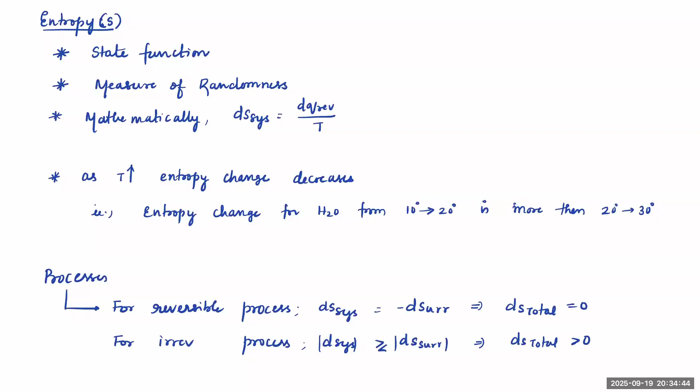We discussed about first law as well as thermochemistry. Now let's get into the second law. So to discuss second law, we need to understand basic terminologies like entropy and all. Okay. So this is where we'll focus.

Entropy is another state function, just like internal energy or enthalpy. We have this one more parameter known as entropy. It is mainly used to measure the randomness, okay, randomness of a system. If there are some particles or anything present within the system, how much is its randomness? That is what is going to be measured.

Mathematically, it is defined as any change in randomness, or what we call the entropy change of a system, is equivalent to the amount of heat that is supplied reversibly to the system at a constant temperature. Okay, so this is what it reads. So, how much amount of heat is being given to the system, right, at a constant temperature. That heat by temperature will increase the randomness of the system, and which is what we measure as change in

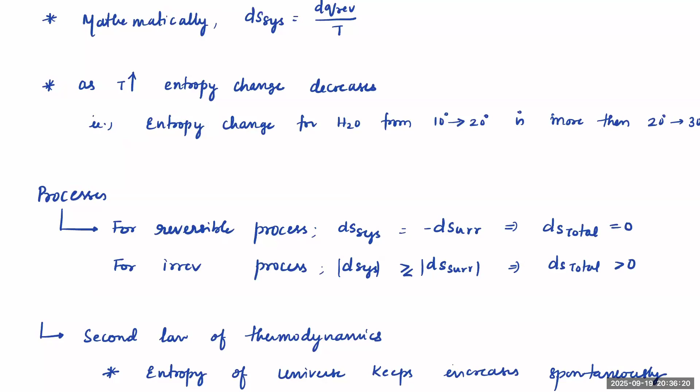entropy. Okay. Now you notice that as the temperature increases, entropy change decreases. This delta S value decreases. Okay. It means something like this. Suppose you have water at 10 degrees and then you are increasing its temperature to 20 degrees by providing some heat to it. So in that case, as you start increasing the temperature, the entropy will start increasing.

So now between these two, if you have delta S1 change, and the same thing between 20 to 30, the entropy change is delta S2. Then one thing we can say, the change in first case will be greater than change in second case. So entropy change at a lower temperature will always be more than entropy change at higher temperature. Okay, clear everybody?

Now, let me just orally remind you, what were the limitations in first law? First law would tell us how the energy transfer is happening, but there is no comment on the extent of the changes that are happening, and the direction the change is happening, whether the overall direction is from system to the surroundings or surroundings to the system. This direction and extent is not something which we can comment on based on first law. But second law mainly emphasizes this part.

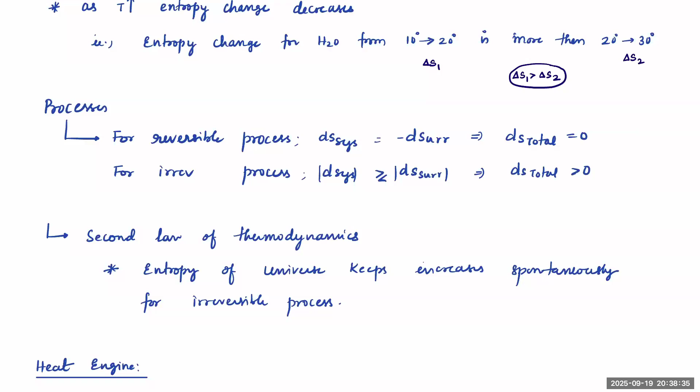For instance, if I take a glass of water here, and this water is at 10 degrees centigrade, what is the chance that it will start forming ice? Or it will start increasing its temperature to, let's say, 20 degrees, considering the outside temperature is 40 degrees Celsius. So chances are this direction is going to be more observed as compared to this direction. Because the surroundings temperature is more, the water will more likely try to gain energy from the surroundings and increase its temperature further.

We cannot expect that at these particular conditions the water will form ice on its own. No, unless we continuously keep decreasing the temperature and bring it to 0 degrees and below, only then will this water start converting into ice. Otherwise, this direction is called the spontaneous process direction. This direction is called the non-spontaneous process direction. Clear? In fact, all natural processes that happen on their own are spontaneous. So this is one important definition we should understand. Clear?

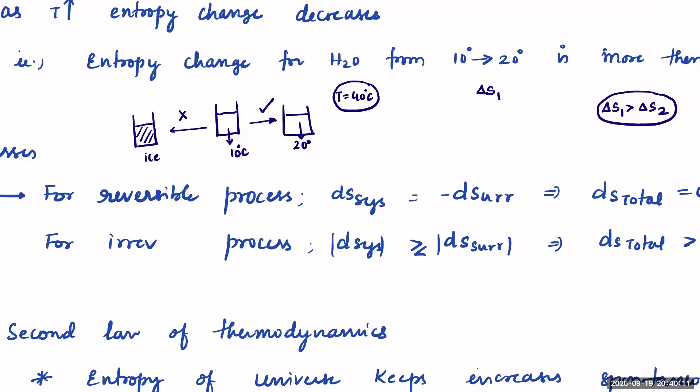Second thing, whenever there is an entropy change for the system, certainly there is some entropy change happening even for the surroundings. And you will notice that delta S of the system is equal to minus delta S of the surroundings, which means delta S total is equal to 0. In fact, any total entropy change is always the sum of the entropy change of the system and the entropy change of the surroundings together.

If a process is happening reversibly, it means that whatever the system's entropy has increased, the same amount was decreased in the surroundings, and vice versa. If the system's entropy decreases, the surroundings' entropy has increased by the same amount. But if it is irreversible, we cannot say that the change magnitude is the same for both. It might happen that the system's entropy is more changed compared to that of the surroundings.

But one thing is for sure: if it is an irreversible process, and we learned that irreversible processes are spontaneous, then for spontaneous irreversible processes delta S of the total will always be greater than 0. Clear, everybody? This is the basic idea we should have first.

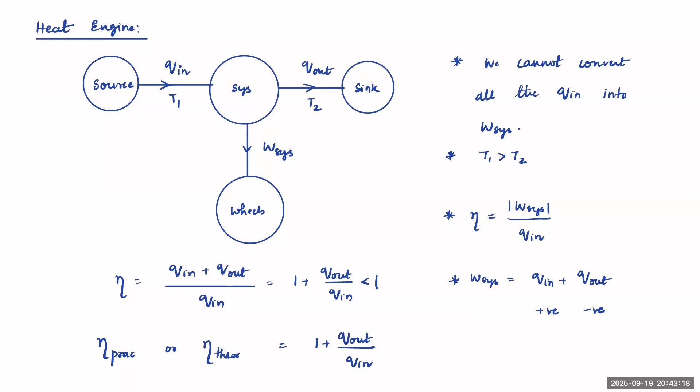Now, let me explain this using the best example possible, which led to the definition of entropy in the first place. The idea of entropy came from the concept known as heat engine. What does heat engine mean? Imagine the system which I have written is like an engine, and you are providing heat to that engine.

To provide heat to this engine, the temperature at the source should be higher so that heat can be pushed into the engine. The heat getting into the engine I will write as Q in, and the temperature at which this transfer happens, T1. In physics you will use QH and TH, where H represents hot reservoir, which is nothing but the source maintained at temperature TH. In chemistry we simply write Q in, the heat going into the heat engine at temperature T1.

Now what happens? The heat engine accepts that heat and tries to convert it into work. The first steam engine starts moving because it converts that heat into work, moving the wheels. But the problem is, the heat engine can never convert all the heat it has taken into work done. Some of the heat will always be lost.

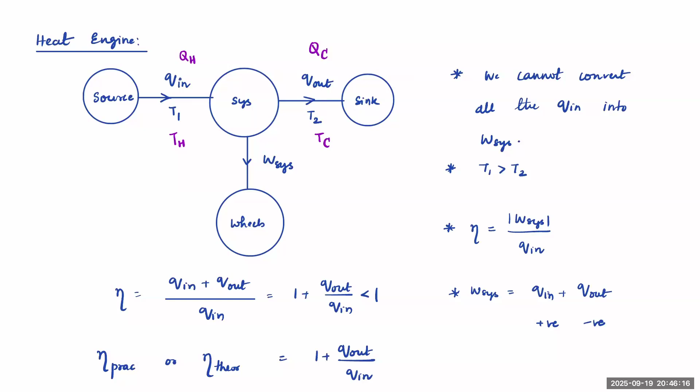The lost energy goes to the surroundings, which in chemistry we call the sink, and in physics the cold reservoir. So here you can write it as QC: some heat is lost towards the cold reservoir or sink, maintained at temperature T2, or TC. This is what you usually expect. There isn't any engine which can convert the entire heat given into work done.

So what should we know from here? Conventionally in chemistry, anything coming to the system is positive, and anything going away from the system is negative. So Q in or QH is positive, Q out or QC is negative, and work done by the system is negative because it is done by the system.

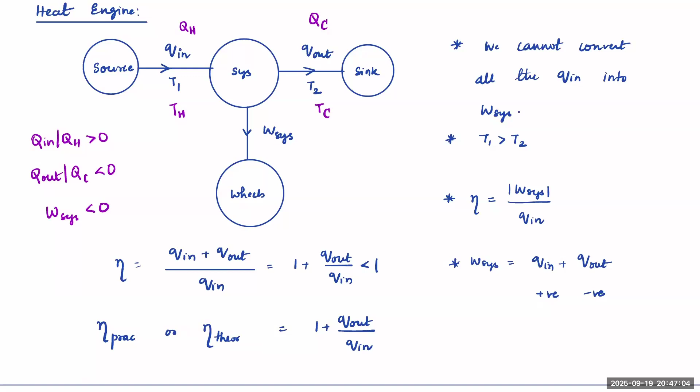These are three important things we should know. Okay. So from here, I can say one thing, that whatever the heat that is being supplied here, see, Q, okay, QH plus QC, that is actually making the work done. Okay. QH plus QC. QH means it is a positive value. This is a negative value. So obviously the difference between these two is what we get as work done. Clear?

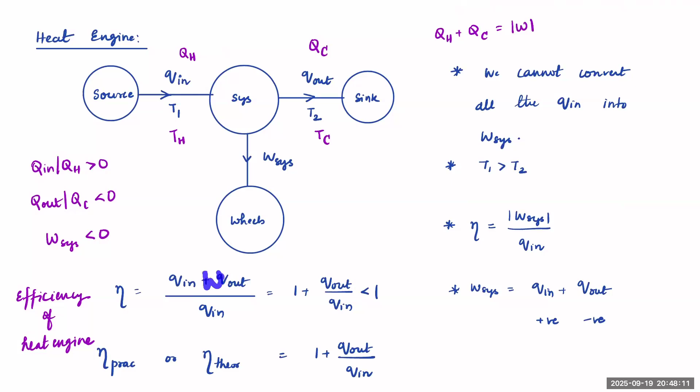Now here is an interesting part. We define a term called efficiency, or efficiency of heat engine. What does efficiency of heat engine mean? That is how much work you are able to extract from the given amount of heat. Have you noticed this? Q in plus Q out is nothing but work done. And that work done is the work which we are extracting out of the given amount of heat. Given amount of heat is Q in. Correct? So Q in plus Q out by Q in is what we define as efficiency.

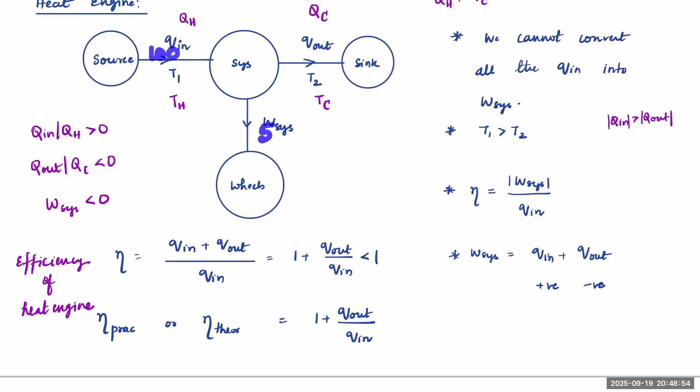And therefore, efficiency can be written as 1 plus Q out by Q in. Now notice this one. Q in by magnitude is always greater than Q out, because you are obviously giving more heat compared to what is dissipated out. It is like this. You are providing 100 kilojoules of heat, out of which 50 kilojoules is converting into work. So the other 50 will be heat that is lost. So obviously Q in will always be greater than Q out.

So this value will be positive. Sorry, this value will be a fraction which will be negative here because Q out is negative. So 1 minus something is always less than 1. That's why efficiency of the engine is always less than 1. Okay.

Now, with this engine, experimentally, we can do it and figure it out as well. That's why if you are representing efficiency in terms of heat exchanges, in terms of how much heat is being given and how much heat is being lost, then that efficiency is defined as practical efficiency. We call it practical efficiency, correct?

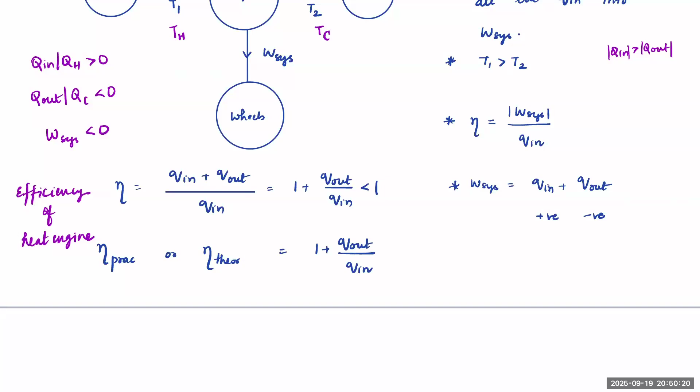In fact, you can define it theoretically also. Theoretically, we can calculate the heats and then figure out the value here. And practically also, you will notice this. So whether it is theoretical or practical, you get this formula: 1 plus Q out by Q in. Clear? Got it?

Now, there are multiple statements which have been proposed from the heat engine. The first statement, which we will be using more often in physics, is the Kelvin Planck statement. This is an alternative statement for the second law of thermodynamics. Clear? It states that it is impossible for any device, as heat engine,

that operates on a cycle, to receive heat from a single reservoir and produce a net amount of work. So it means that some amount of heat must be rejected at low temperature.

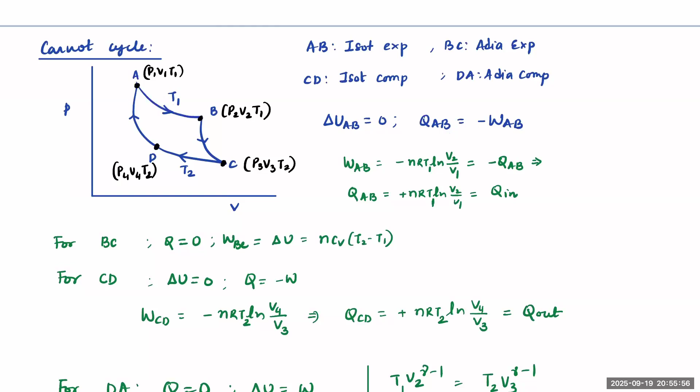Now notice what factors we need to know. From A to B, there is no change in temperature, and we are assuming an ideal gas only. So delta U of AB is 0 because delta U is nCv delta T. Delta T is 0 means delta U will be 0. So between A to B, if delta U is 0, work will be the same as heat with a change in sign. So what is the work done from A to B?

It is an isothermal reversible expansion because I am showing a process curve. So for reversible isothermal expansion, the formula is minus nRT1 ln V2 by V1. This is work done from A to B, which gives the heat from A to B. Q of A to B is this much. I can represent this heat as Q in, the amount of energy that we have given to the system.

Next, let us analyze B to C. From B to C, Q is 0 because it is an adiabatic process. So W of BC should be equal to delta U, and delta U is nCv (T2 minus T1). So this is the second part which we know.

Third part, from C to D, it is again an isothermal compression. So delta U again becomes 0, and Q will be equal to minus W. So W of CD will be minus nRT2 ln V4 by V3. Now, what is the heat from C to D? It will be equal to minus W, which is plus nRT2 ln V4 by V3. Correct?

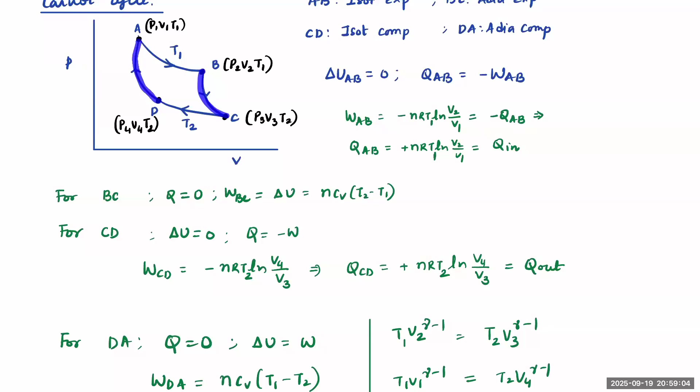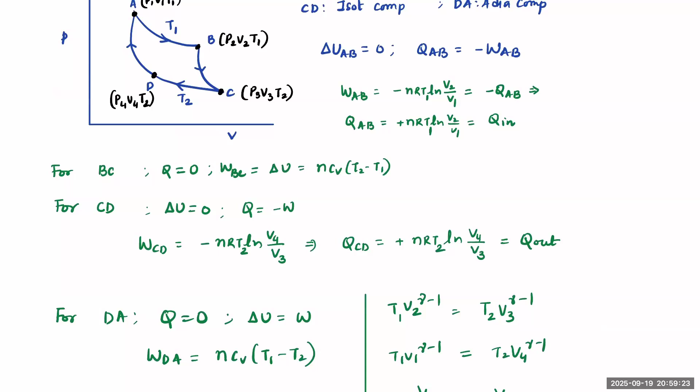Now let's notice this. These two are reversible adiabatic changes, and for reversible changes this formula is applicable. So at point B, I can write T1 V2 power gamma minus 1 is equal to, at point C, T2 V3 power gamma minus 1. Similarly, we can write at these two points also.

So T1 V1 power gamma minus 1 is equal to T2 V4 power gamma minus 1. If you divide both of them, T1 and T2 cancel, and we get V2 by V1 is equal to V3 by V4. Which means ln V2 by V1 will be equal to minus ln V4 by V3.

Got it? Now notice what is the total work done. Total work done will be equal to W A to B, B to C, C to D and D to A. And you know that W BC and DA, these two will get cancelled. BC and DA will get cancelled. So what is left now?

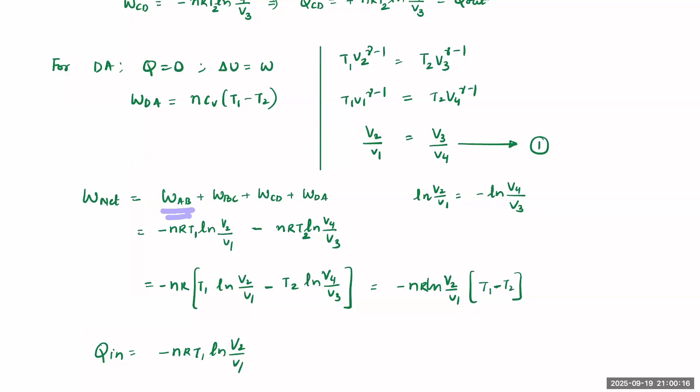Work from AB, which is minus nRT1 ln V2 by V1. And this is minus nRT2 ln V4 by V3. And from there, if I take nR common, I will get T1 ln V2 by V1, and minus T2 ln V4 by V3. So from here, if I take this minus common outside, it is minus nR ln V2 by V1 into T1 minus T2.

Okay. So Q in, because this is the total work done. And how much is the input of the heat? It is minus nR T1 ln V2 by V1. And now efficiency, how do we define efficiency? That is work done by heat given. So work done is minus nR ln V2 by V1 into T1 minus T2 divided by nR T1 ln V2 by V1.

Okay. So now you can see these two factors will get cancelled. nR will get cancelled. What is left is T1 minus T2 by T1. Or I can write it as 1 minus T2 by T1. Now this is the theoretical efficiency. So efficiency in Carnot cycle.

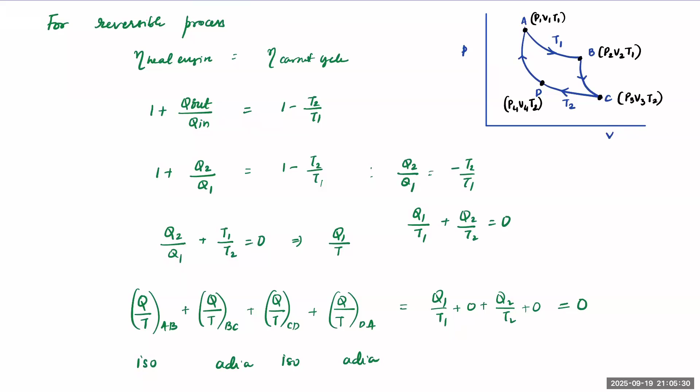Okay. We know that for a heat engine, we have written the efficiency as 1 plus Q out by Q in. Here it is 1 minus T2 by T1. So if I bring these terms together, cancel off this 1 and 1, then I can say Q2 by Q1 is equal to minus T2 by T1. Correct? And if I take it to the left hand side, I will get Q2 by Q1 plus T2 by T1 is equal to 0.

Or I can in fact do one thing, put T2 here and bring Q1 here. In that case, I get Q1 by T1 plus Q2 by T2 is equal to 0. This is also something I can write. Everybody, please notice this part here. Q1 by T1 plus Q2 by T2 is equal to 0. Okay. Now notice this carefully. Can I write the same equation this way?

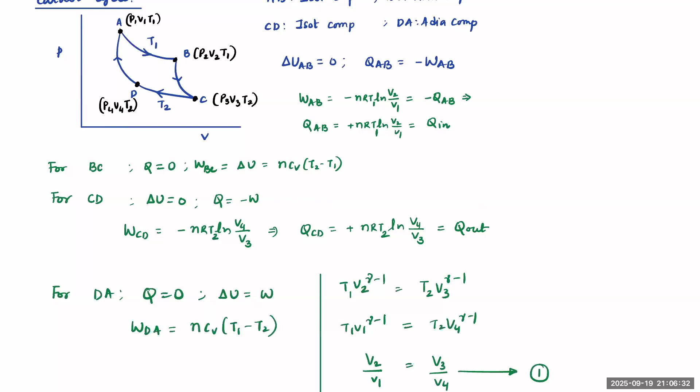Q by T as a factor, as some kind of a parameter. That q by t from A to B, if you go in the Carnot cycle, is q1 by t1, correct? A to B is q1 by t1, plus B to C, q by t. Because q is 0, this factor has become 0.

And again from C to D, that is q by t, this is nothing but q2 by t2. So again this factor exists, but the last factor q by t again is 0, because from D to A, q is 0. So can I write this same equation as q1 by t1 plus 0 plus q2 by t2 plus 0 is equal to 0. So this is for isothermal, adiabatic, isothermal, adiabatic.

Correct? So I got a new factor altogether, which is called q by T. That q by T value in a Carnot cycle, from the start as you come back to the original state, the sum of that factor becomes 0. Now tell me, if a parameter's change becomes 0 in a cyclic process, what does that mean? That means it is a state function, isn't it? A state function will only have its summation over the entire cycle as 0.

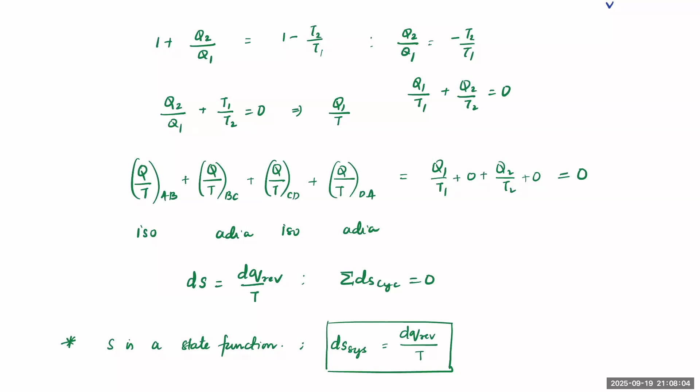Got it? So therefore, q1 by T1 plus 0 plus q2 by T2 plus 0 equal to 0 represents that this factor which I'm defining is a state function. So hence this q by T function is what I'm defining as dS, change in entropy. That's how we got the idea of what is entropy. So entropy change is equal to q by T. If it is a small change, I can write it as dq by T. And this is only defined for reversible processes.

So therefore, dS has to be dq reversible by T only. And summation of dS cyclic is 0. That means it is a state function. So S is a state function and this is the formula. I guess the part is clear, everybody?

Okay. Now, let me explain the second part. This is something which I assumed to be reversible, correct? So we got one thing. For a reversible process, the total entropy change of the system has become 0, correct? But now what if it is an irreversible process? For an irreversible process, you know that eta theoretical is greater than practical. We know this because of the work done, right?

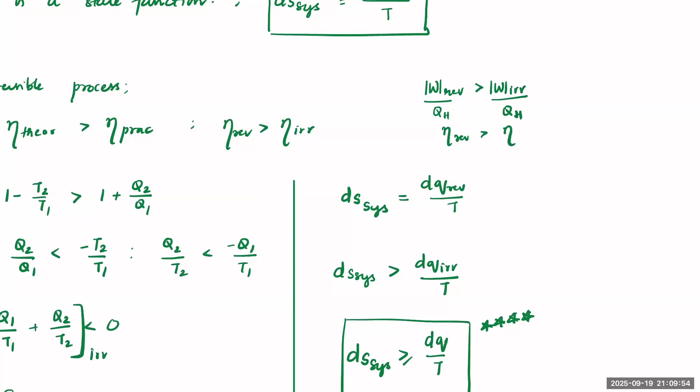Work done in a reversible process will always be greater than work done in an irreversible process, correct? And if I divide it by qh here, then I can say reversible work done by qh is always greater than irreversible work done by qh. And this is efficiency reversible versus efficiency irreversible. That's what I have written here. Theoretical efficiency is always greater than practical efficiency. That is, reversible efficiency is greater than irreversible efficiency.

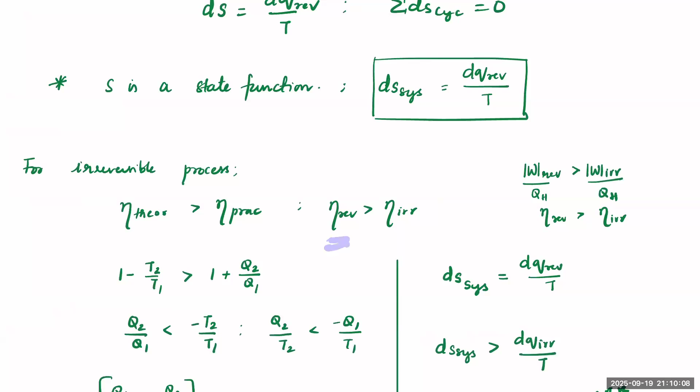Reversible efficiency we defined based on the Carnot cycle, which is 1 minus T2 by T1. Irreversible, we can write in terms of Q1, 1 plus Q2 by Q1. Now you can see these will get cancelled. So Q2 by Q1 is less than minus T2 by T1. Correct? Okay? And if I bring Q1 here and T2 here, I will get minus Q1 by T1 and here Q2 by T2. Both of them are related this way.

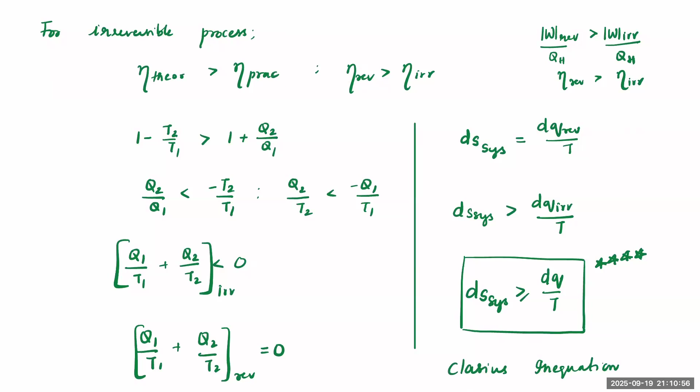Now, if I bring it to the left hand side, I will get Q1 by T1 plus Q2 by T2 is less than 0. Clear? So from here, what are we getting? The summation of this value which we defined earlier, summation of Q by T, is coming out to be less than 0 for irreversible. Acha, what if it is reversible? If it is reversible, it becomes equal to 0, correct?

So this is for irreversible, and summation of Q by T earlier we got equal to 0. This was for reversible. Now these two put together, we can write as a formula: the integral of Q by T will be less than or equal to 0 for a cyclic process. And this is called the Clausius inequality. We call it Clausius inequality or inequation. Okay.

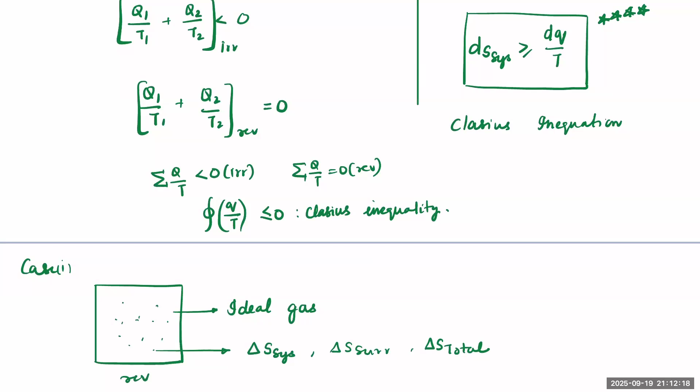Got it. Now notice, entropy change of a system was defined as dq reversible by T. dS of the system can also be compared with dq irreversible by T, but it should be greater than that. It cannot be equal to that. Clear? Because equal means it has to be reversible only. If it is greater than this value, it has to be irreversible heat given. Got it?

Everybody clear? So in simple terms, I can write S is a function of disorder. S is a function of disorder. So if disorder increases, which means entropy increases. Okay.

Any doubt here? Now notice the last step here. dS system is greater than or equal to dq by T. Okay, what does this mean? See, if dq by T is less than 0, that means it is irreversible. But if it is equal to 0, that means it is reversible.

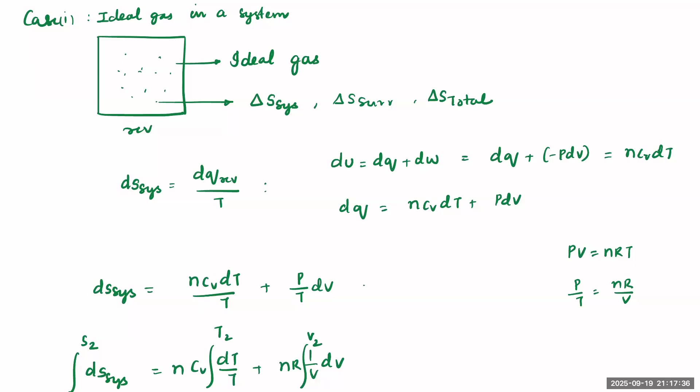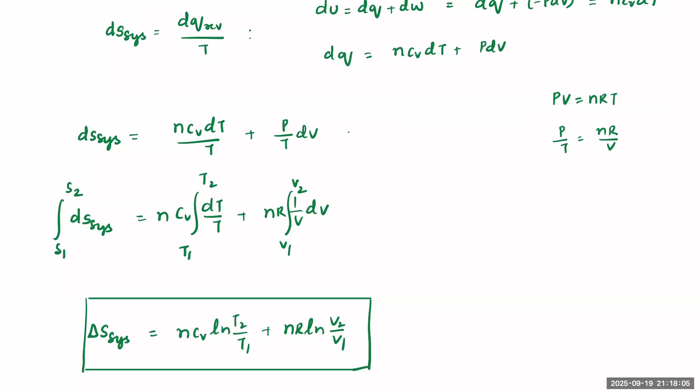I can use that, isn't it? So instead of this q reversible, I can write this value here, because currently I'm doing it for a very small change, assuming it like a reversible change. So nCv dT by T plus P by T dV. Now, if I integrate on both sides, dS of the system from S1 to S2 will be nCv dT by T plus nR integral of 1 by V dV, from V1 to V2.

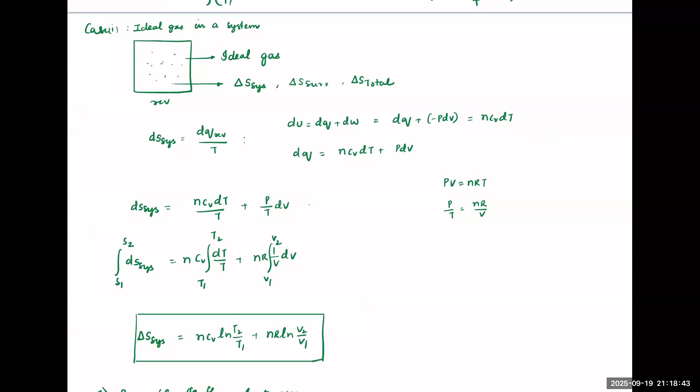Integrating, I'll get nCv ln T2 by T1, and nR ln V2 by V1. So this is the formula we'll be using for an ideal gas in a system: how much is its entropy change if temperature and volume are changing. I guess the general formula is clear, everybody. Delta S of the system is nCv ln T2 by T1 plus nR ln V2 by V1.

Now let us start putting case by case here. First case is, what if it is a reversible isothermal process? We are taking the same ideal gas, but in a reversible isothermal process. Now what can we say? Just now we have checked this formula. Since it is isothermal, there is no temperature change, so this factor is 0. So delta S of the system will be nR ln V2 by V1.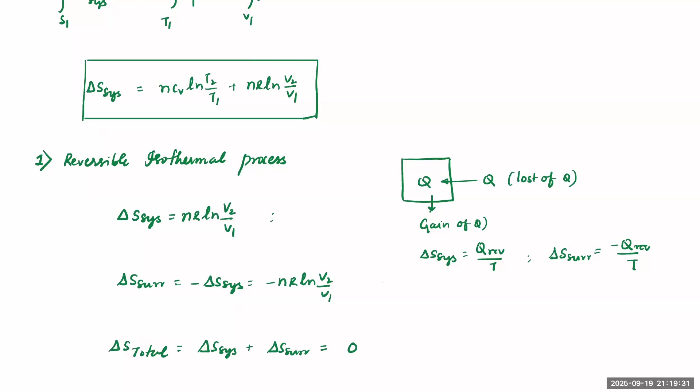And what will be delta S of surroundings? Because it is reversible, whatever the change in the system, that should be the same loss in the surroundings. So delta S of the surroundings will be minus nR ln V2 by V1. This is system, this is surroundings. And delta S total will be the sum of those two. It has to be 0 because it is a reversible isothermal process. Any reversible process means delta S total should be equal to 0.

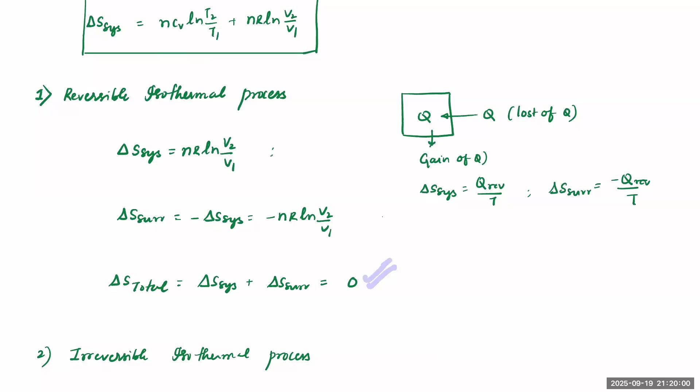Now, second part is isothermal irreversible process. So you can see delta S of the system will be nR ln V2 by V1, because it is still isothermal, so the T factor will not be there. This is the formula we know. Delta S of the system reversible will be equal to delta S of the system irreversible, as long as the final volume conditions are same. Does it make sense what I have written?

See, whether you operate a system reversibly or irreversibly, as long as your final destination is same, the entropy change will be same. Reason: entropy change is a state function. It only depends on initial and final condition. So whether you drive the change reversibly or irreversibly, both magnitudes should be same. Got it?

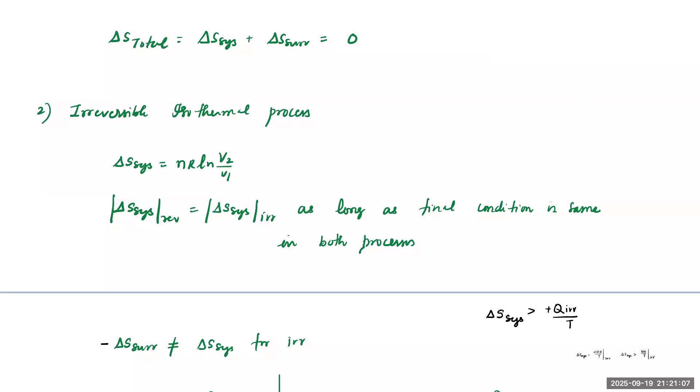Therefore, I can say that minus delta S of the surroundings is not equal to delta S of the system for irreversible process. For irreversible, delta S of the system is not equal to Q reversible by T. But now for irreversible processes, what about surroundings? For reversible process, delta S of the surrounding will simply be equal to minus Q reversible by T. This is what we learned.

But what about irreversible case? Delta S of the system is also not equal to Q irreversible by T. But notice this one: for irreversible case, delta S of the surroundings will be equal to minus Q irreversible by T. Now you might say, sir, how is this formula valid? When there is some heat lost or gained in the surroundings, do you see much change occurring in the surroundings?

Simple example, let's say I took a matchbox and started burning a small piece of paper here. The temperature change because of that burning might affect a small region where I'm sitting. Will there be much change of temperature in the surroundings? No, not much. Which means for surroundings, any change happening is a very gradual, very slow, quasi-static change. Understood?

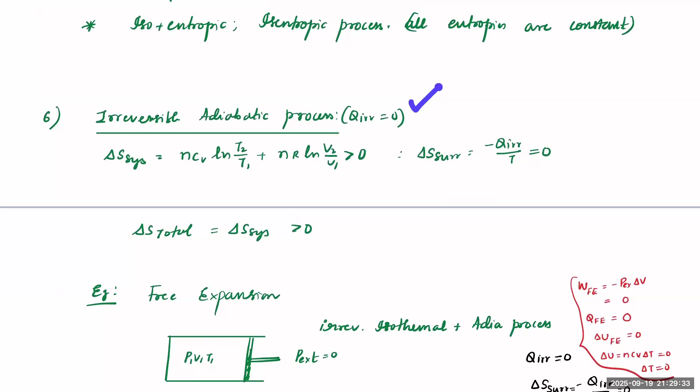Now let us talk about irreversible adiabatic process. Q irreversible is 0. Now, delta S of the system, how did we define? N CV ln T2 by T1 plus N R ln V2 by V1. This is how we define. Since it is irreversible, minus Q irreversible by T should be defined as delta S of surrounding. But because Q irreversible is 0, this factor is 0. So delta S of the surrounding will be equal to 0. So delta S of total will be delta S of the system plus delta S of the surroundings. So therefore delta S of the total is same as delta S of the system, and that has to be greater than 0. So this is irreversible adiabatic process.

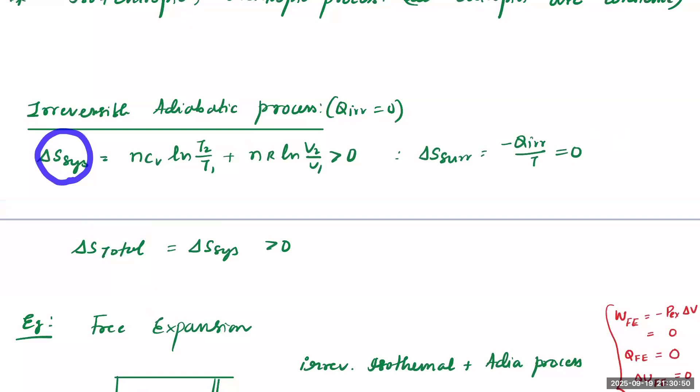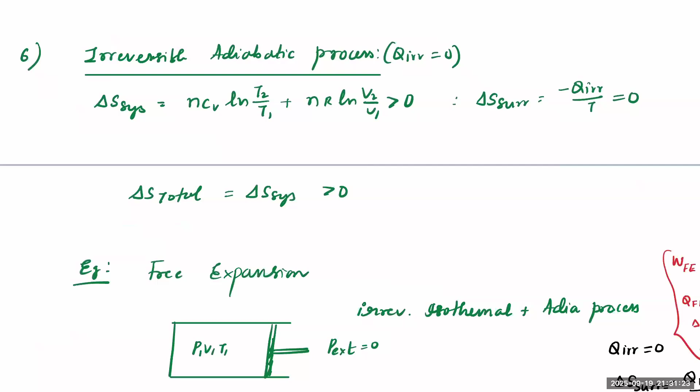Now there is one very important thing. Since delta S of the system in a reversible process was 0, I can't say that delta S of the system for irreversible will be 0. You cannot say that, sir, it is a state function. Yes, it is a state function, but you will never be able to achieve all the dimensions same or any one of the dimensions same with reversible versus irreversible. So therefore, in case of irreversible, delta S of total is equal to delta S of system, which is greater than 0.

Guys, please check this out. If there is any doubt, let me know. Otherwise, we'll go ahead.

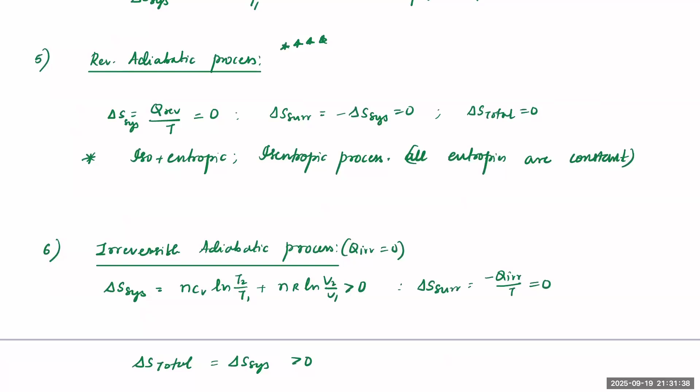What if you have a free expansion? Free expansion, we have learned it earlier. In case of free expansion, work done is 0. Heat given is 0. So it is irreversible adiabatic. Delta U is 0. Delta H is 0. Delta T is 0. Now, imagine an ideal gas is present at pressure P1, volume V1, temperature T1. Everything outside is vacuum, so there is no external pressure as such. So naturally this gas will start trying to expand on its own.

So irreversible isothermal plus adiabatic process. It is irreversible, it is isothermal, temperature is not changing, and adiabatic also. So delta S of system will be equal to nR ln V2 by V1, and delta S of surroundings will be equal to 0, because Q irreversible is 0, but system cannot be 0 because volume is increasing. Hence, delta S of total will be equal to nR ln V2 by V1. So remember in free expansion, if anything is changing, it has to be entropy of the system. So entropy of the system is increasing. Clear?

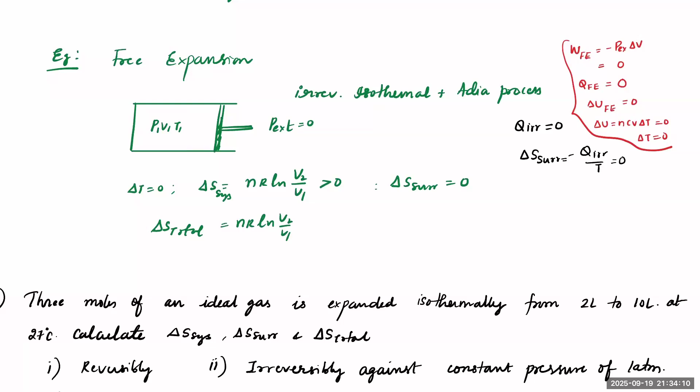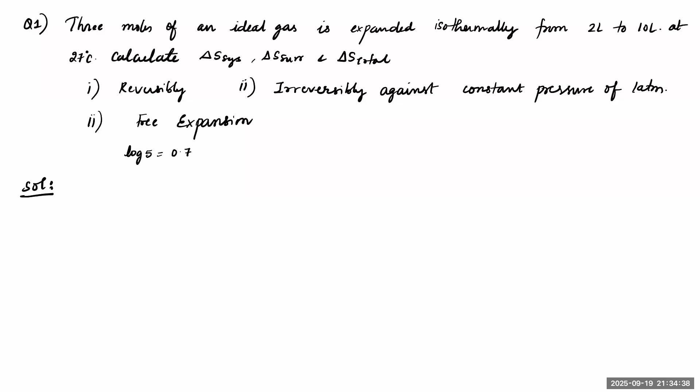Right. Let's solve this question now. Check it out. 3 moles of an ideal gas is expanded isothermally from 2 liters to 10 liters at 27 degrees. Calculate system, surrounding, and total entropy change in 3 different conditions. One is reversible, irreversible, and free expansion.

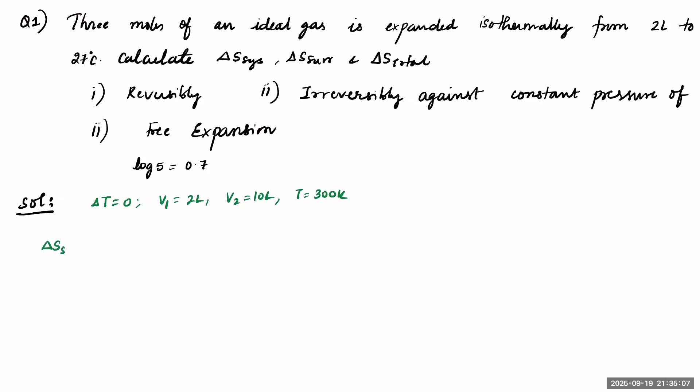So, starting with temperature T1, sorry, temperature is constant, so delta T is 0. Volume V1 is equal to 2 liters, V2 is equal to 10 liters. Temperature at which it is maintained is 300 kelvins. So now delta S of the system will be equal to nCv ln T2 by T1 plus nR ln V2 by V1. This is the general formula. And now since temperature change is not observed, so it has to be only nR ln V2 by V1.

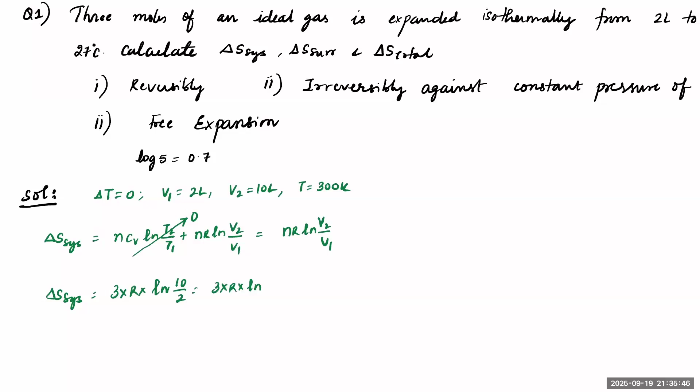So delta S of the system is equal to 3 moles. So 3 into R into ln V2 by V1, which is 10 by 2. So it is 3 into R into ln 5. So this is equation 1. Put this as equation 1.

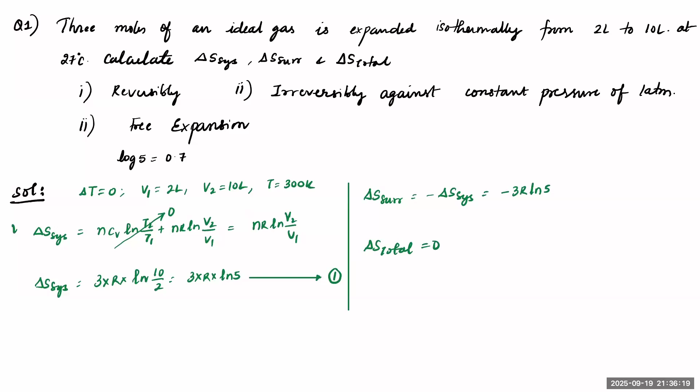Okay. Now what about surroundings? Delta S of surrounding, if it is reversible, has to be minus delta S of the system, which is equal to minus 3R ln 5. And delta S of the total has to be equal to 0. So this is for case 1. Let us do it for case 2 now.

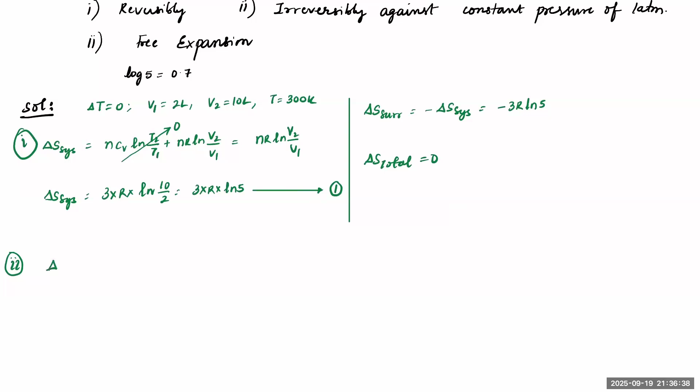In case 2, it is irreversible against constant pressure of 1 atm. External pressure is given as 1 atm. So you can see here also delta T equal to 0 because it is isothermal, and I can say that delta S of the system operating reversibly has to be the same as delta S of the system doing it irreversibly to finally go to the same volume. So in that case delta S of the system irreversibly will be equal to the same 3R ln 5,

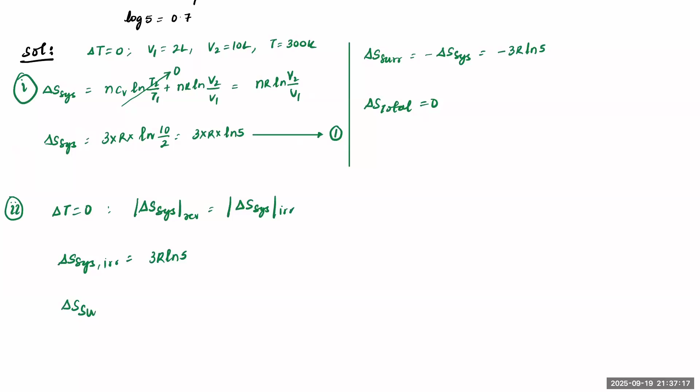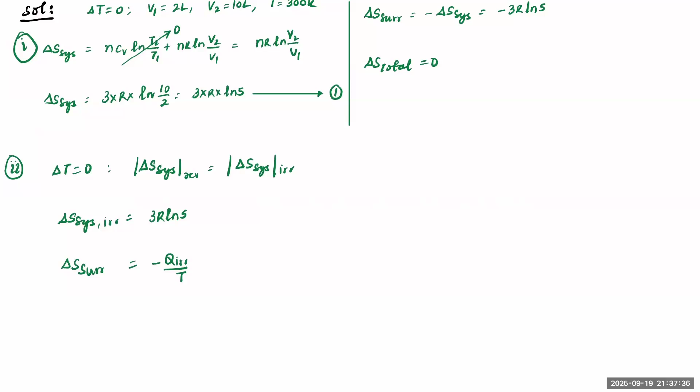while delta S of the surrounding will be equal to minus Q irreversible by T. It has to be minus Q irreversible by T. Clear? And how much will minus Q irreversible by T be? Now notice this one. Because it is an isothermal process, delta U will be 0. If delta U is 0, Q irreversible will be equal to minus W irreversible. So work done irreversible will be equal to minus Q irreversible.

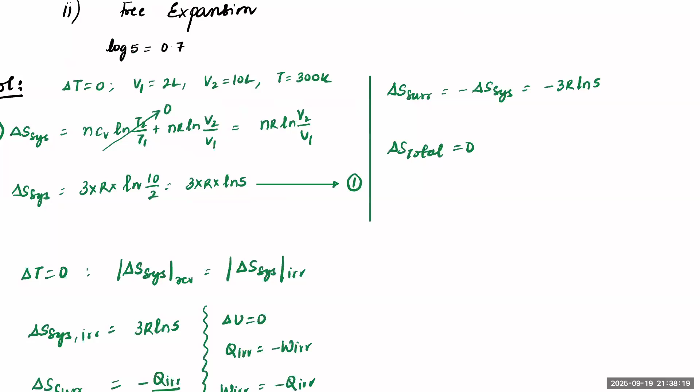So therefore, delta S of the surrounding can be written as W irreversible by T, and W irreversible can be written as minus P external into delta V by T. External pressure is given as 1 atm, into final volume 10 minus initial volume 2. So it is 8 atm liter, and this will be the work done, divided by T. T is 300.

Okay. I can put this as atm liters. I can put this in joules as 8 into approximately 100 by 3. So which is 8 by 3 joules per Kelvin. This is the approximate value for delta S of surroundings. This is in the second case, everybody.

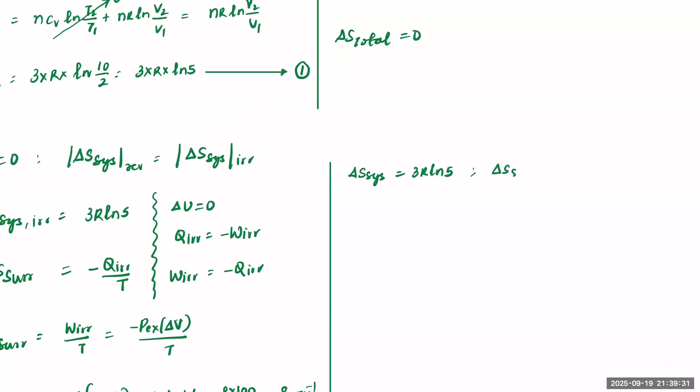So you can notice that delta S of the system, which is equal to 3R ln 5, is not changed. While delta S of the surrounding, we just found it as 8 by 3 joules per Kelvin. So what should be delta S of total? It has to be 3R ln 5. Okay. And notice this one.

So here minus should be there. This is actually a minus value. So that is equal to minus of 8 by 3. So this will be the case, and it has to be greater than 0. Even after solving, you will get the same thing. Please go through the two cases here. I hope the irreversible case is clear, everybody.

Finished. Second one is clear.

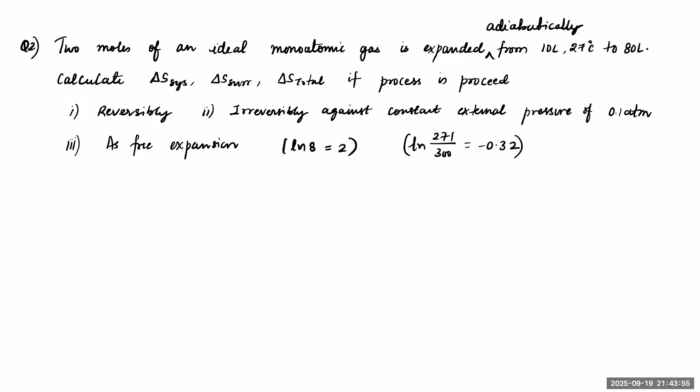Finished? Everyone? Right. Let's see the next one here on similar lines. 2 moles of an ideal gas is expanded adiabatically this time. Earlier it was isothermal. Now it is adiabatic, from 10 liters, 27 degrees Celsius to 80 liters. Calculate delta S of the system. Again, first if it is reversible, second if it is irreversible, third if it is free expansion. Got it?

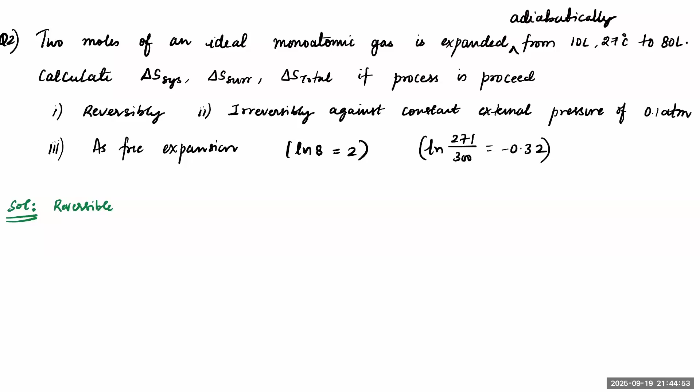Everybody, let's solve it together. Check it out. First one being reversible. For reversible process here, what are the factors given?

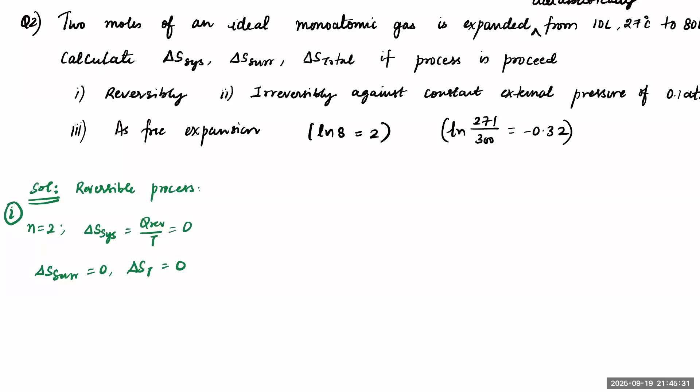N is equal to 2, and because it is an adiabatic process, delta S of the system is Q reversible by T, and Q reversible is 0, so delta S of the system is 0, delta S of the surrounding will be 0, delta S of the total will be 0 because it is an isentropic process. So this is the first case, the reversible case. Now let's talk about the second case, when it is irreversible.

So in the irreversible case, you know from what volume it is going to what volume and what was the initial temperature. So we need to first find out the final temperature. To do that, you know that delta U is equal to Q plus W, Q irreversible plus W irreversible. This is for the irreversible process.

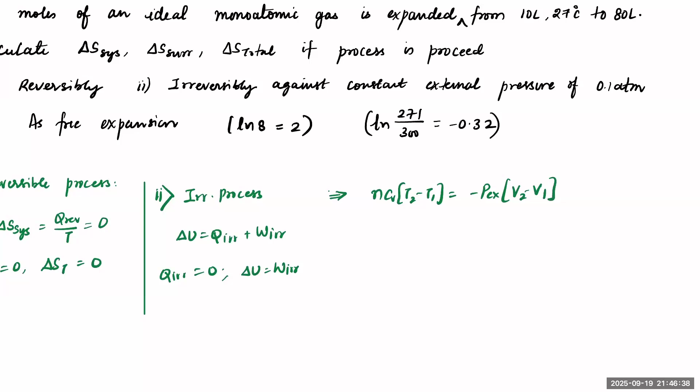But Q irreversible is 0 this time. So delta U will be equal to W irreversible, which implies delta U can be written as nCv delta T, which is T2 minus T1. That is equal to W irreversible, which can be written as minus P external into V2 minus V1. And you know that the final pressure will always be equal to the external pressure.

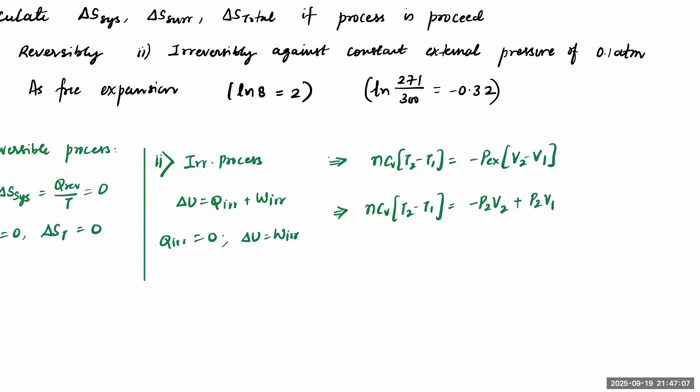So that implies nCv into T2 minus T1 is equal to, this is P2, so if I take it inside, I'll get minus P2 V2 plus P2 V1. And since it is an ideal gas, we know that P1 V1 is equal to nRT1 and P2 V2 is equal to nRT2. Let me use that value here.

So I can write nCv into T2 minus T1 is equal to minus nRT2 plus P2, and P2 can be written as nRT2 by V2, into V1. So nR will come common, and Cv, since this is given for a monoatomic gas, is 3 by 2 R. If I substitute that, R gets cancelled and n gets cancelled. So what are we left with?

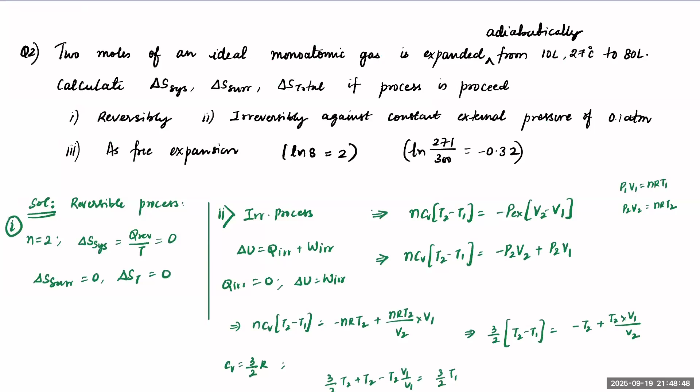We'll be left with 3 by 2 into T2 minus T1 is equal to minus T2 plus T2 into V1 by V2. So we get 3 by 2 T2 plus T2 minus T2 into V1 by V2, equal to 3 by 2 T1. Now V1 by V2: originally the volume was 10, now it is 80.

3 by 2 T2 plus T2 is 5 T2 by 2. So 5 T2 by 2 minus T2 into V1, which was 10, over V2, which is 80, so it is 1 by 8. So this is 5 by 2 T2 minus T2 by 8, equal to 3 by 2 T1.

So we get 20 T2 minus T2 by 8 is equal to 3 by 2 T1. This goes 4 times. Taking it to the other side, this becomes 19 T2 is equal to 12 T1. So T2 will be equal to 12 T1 by 19. Please check it out, everybody. Sure, got that.

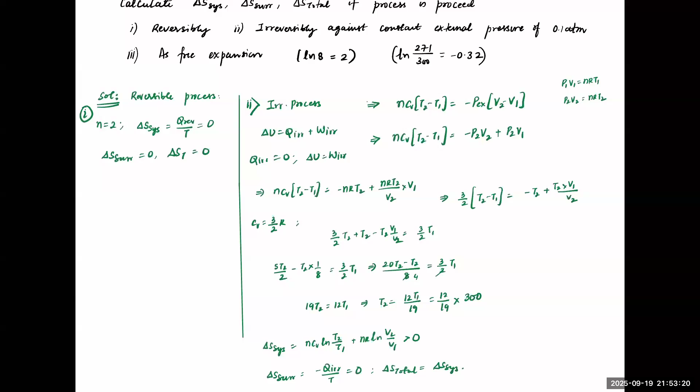Now what about the third one? When it comes to the third one, it is free expansion. For free expansion, you know that Q irreversible is 0. It is an irreversible expansion. Delta T is also 0. So delta S of the system only depends upon one factor, which is nR ln V2/V1.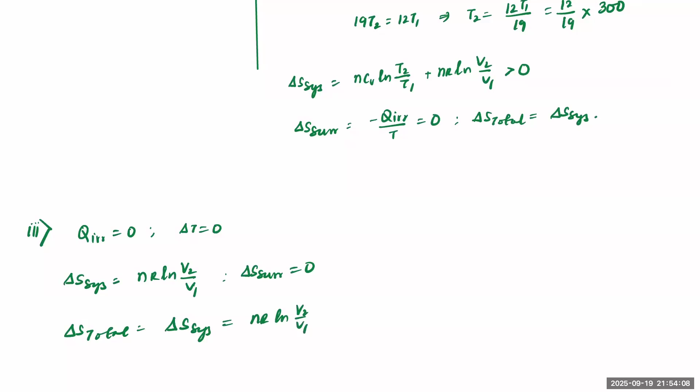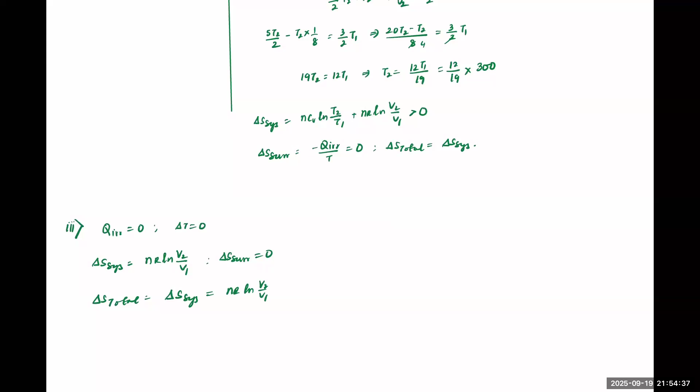And these values are given to you already. And delta S of surrounding will be equal to 0. And delta S of total will be the same as delta S of system, which is equal to nR ln V2/V1. That's it. So this is about free expansion. Done?

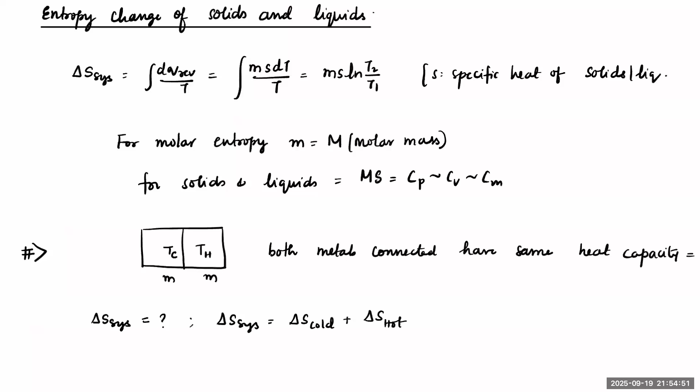Right. Now, whatever we discussed was about entropy change for an ideal gas. So see the second case. What if it is entropy change of solids and liquids? By definition, we have discussed this as Q reversible, correct? But this heat which is given can be represented as ms delta T. And usually for solids and liquids, we consider that the mass and specific heat values are constant.

So if these are constant values, and you integrate this from T1 to T2, we can say delta S of the system will be equal to ms ln T2/T1. So if it is for molar entropy, this m should become molar mass. That's it. For solids, Cp, Cv, everything is the same. We can simply write it as Cm here. Clear.

Now, notice this case as an example. Suppose I have two metal blocks connected with each other, like this. One metal block is cold, the other metal block is hot, at Tc and Th temperatures. Both have mass m. Both of them are made up of the same material. They are not different either.

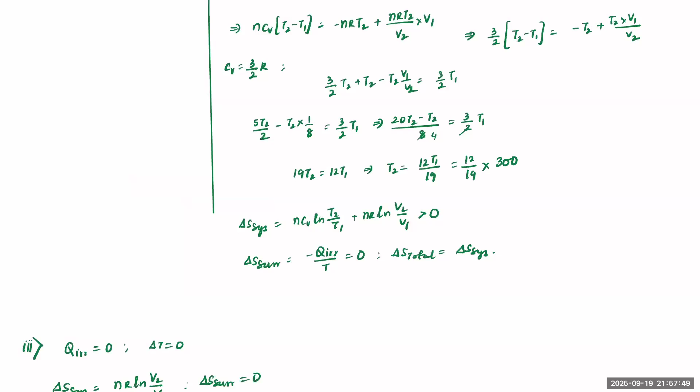T average will be equal to (Tc + Th)/2, because both of them have the same masses. We don't have to change much. So simply the average final temperature will be (Tc + Th)/2. So now delta S of cold can be written as ms ln T2/T1. This is what we learned from the above formula: ms ln T2/T1.

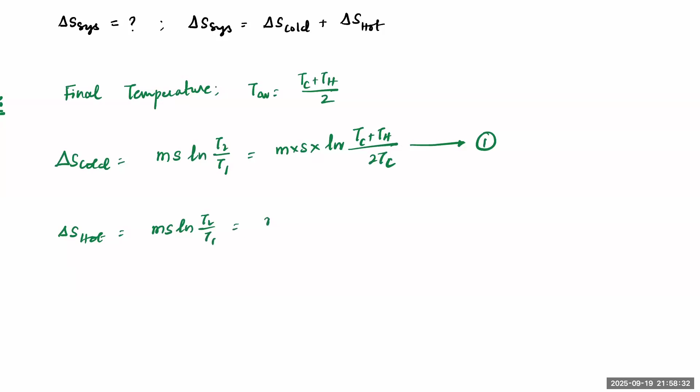So I'm writing this as m into s into ln. For the cold case, the final temperature is this much, and initial temperature is Tc. Therefore, (Tc + Th) divided by 2 times Tc. This is formula 1. Similarly, delta S of the hot body will be equal to ms ln T2/T1, which is m into s into ln. T2 is the same thing, so we get (Tc + Th) by 2 Th.

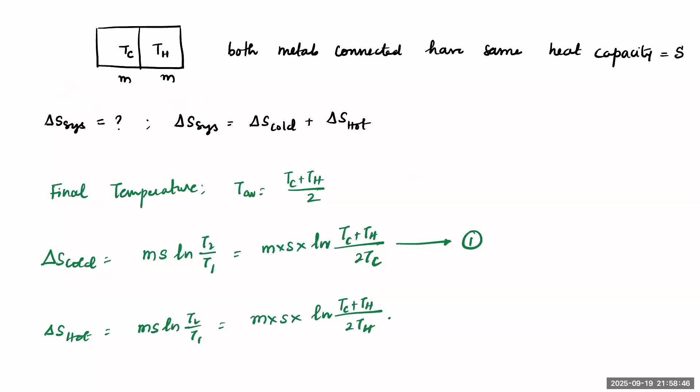Now for delta S of total, if I add both of them, delta S of total will be cold plus hot. So ms will come out common, into ln (Tc + Th) whole square divided by 4 TcTh. So remember, this is the formula. This has been asked many times in JEE, please check. Everyone, let me know if you have any doubt there.

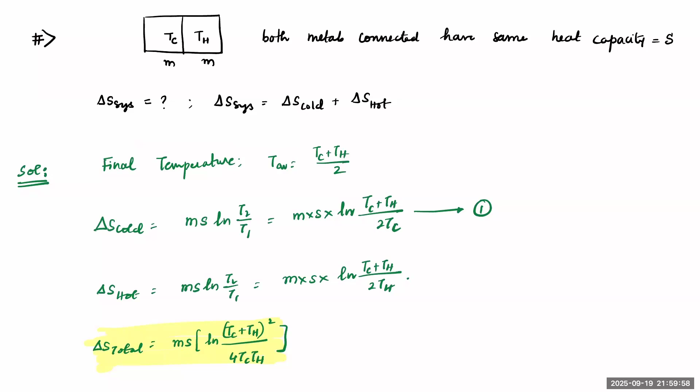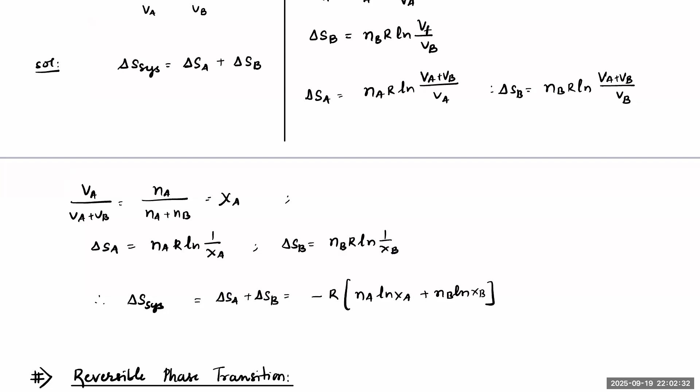Now the total entropy change will be equal to delta SA plus delta SB. So when you bring this XB to the numerator, this will become minus. So that's why the minus R is carried forward and you will get nA ln XA plus nB ln XB. This is how you can calculate the entropy when the mixing of gases has been done. Please check quickly, everybody.

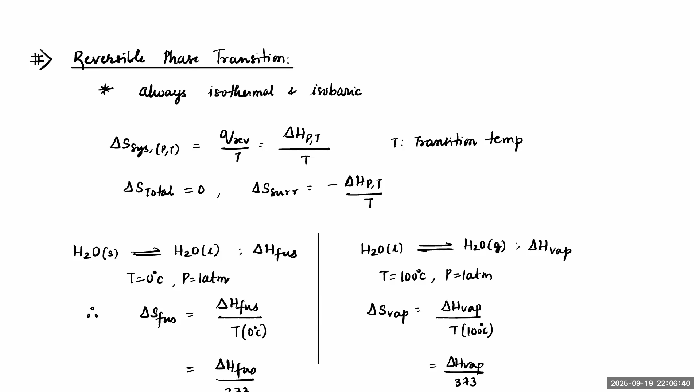Okay. And now that's what we are trying to do here. Check out. Always it is isothermal and isobaric. Reversible phase transition is always isothermal and isobaric because phase transition always happens at constant pressure and constant temperature. Okay. So if delta S of the system at constant temperature and pressure is taken, if you provide Q amount of heat, so Q reversible by T. And at constant pressure, whatever heat is given will only change the enthalpy of the system. So hence, Q reversible can be written as delta H, the enthalpy change of the phase change, divided by T.

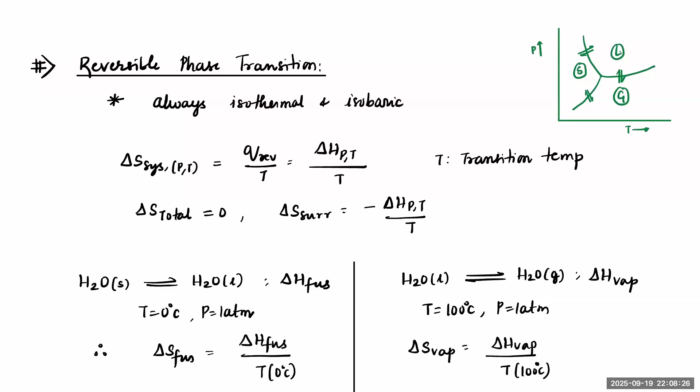Okay. T is the transition temperature. So if it is going from solid to liquid, that is the transition temperature we are talking about. In that case, that will become fusion temperature. If it is liquid to gas, it is boiling point. So one is melting point temperature, the other one is boiling point temperature. So you can see here H2O solid in equilibrium with H2O liquid, delta H fusion, if temperature is 0 degrees, that will be the melting point. So delta S of fusion will be equal to delta H of fusion by 273.

Same way, liquid to gas, it will be vaporization. Temperature is 100 degrees Celsius, pressure is 1 atm. So delta S of vaporization is equal to delta H by T, so delta H of vaporization by 373. Okay. You can do the phase change even when you have an allotropic change. That is, gray tin changing into white tin. So delta S of allotropic is delta H of allotropic by transition temperature. Okay. So I think this part is clear.

Now notice there is something called Trouton's rule. Okay. The ratio of molar heat of vaporization of a liquid to its normal boiling point is approximately the same for all liquids, and that is equal to 88 joules per Kelvin. Got it? Clear? So which means the entropy change of almost all liquids at their respective normal boiling points comes to the same value, that is around 88 joules per Kelvin. This is called Trouton's rule.

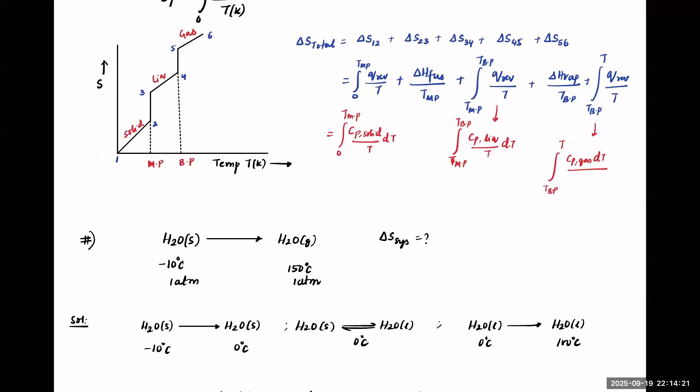Clear? So now how do we write the total entropy change from 1 to 6? What are all the entropy changes involved? Delta S total will be equal to delta S 1 to 2, then 2 to 3, 3 to 4, 4 to 5, and 5 to 6. Now 1 to 2: from 0 till melting point, integral of Q reversible by T, plus 2 to 3, delta H of fusion divided by the melting point temperature. Next, 3 to 4.

3 to 4, you go from melting point towards boiling point. You're integrating, so it is Q reversible by T. Done. Next, 4 to 5. Only vaporization is happening and boiling point is constant, so delta H of vaporization by T boiling point, plus lastly 5 to 6, which is from boiling point to a certain temperature T, Q reversible by T.

Okay. And in the first case, since it is a solid, Q reversible can be written as Cp solid into dT by T. Similarly, from the melting point towards the boiling point, we can write Cp liquid dT by T. And the last one, Q reversible is Cp of the gas into dT by T, from boiling point to any temperature T, clear?

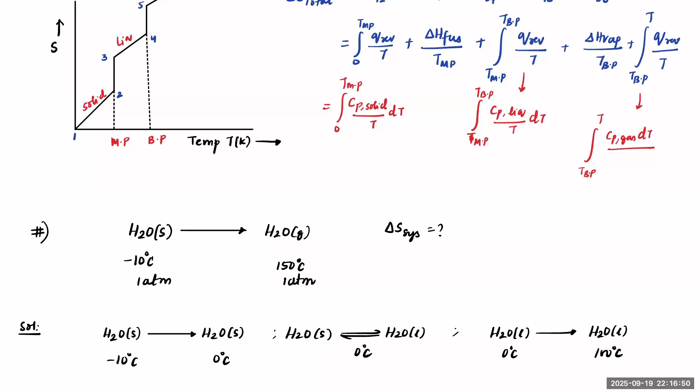Because you are operating at constant pressure, Q reversible can be written as Cp dT by T. dT by T, I forgot to write T. Everyone clear how to write the entropy change? Let's go through that question once.